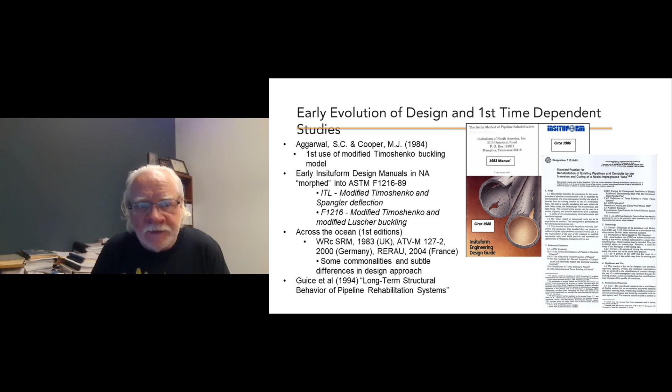The other really critical chunk of early work was what Insituform had commissioned to better understand long-term behavior. That was really the evolution of design, and Guice's work at Louisiana Tech was the first long-term structural behavior study, putting some meat on design in terms of understanding the time-dependent properties of liners, which is a really critical aspect. That is the framework of knowledge.

I still go back to this symposium that was held, and it was enlightening. Part of it was holding a symposium to try and get a handle on how design was done and the differences around the world. It was organized at University of Waterloo in 2001.

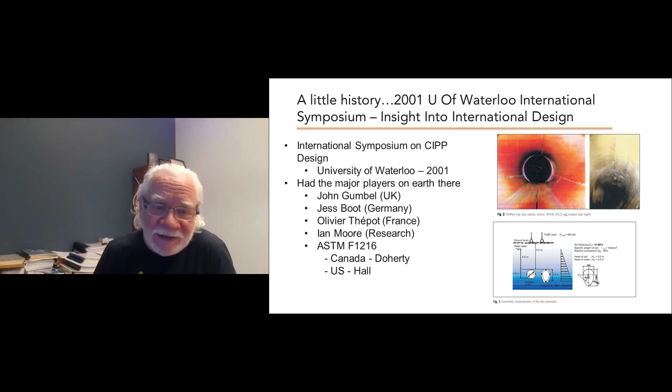I would say if there's a weakness in it, it's that we looked at two pipes that weren't really beat up that much. You learn a lot when you dig deep, but in essence the first conclusion was that F1216 and the way these pipes function sat right in the middle. If you look at face value, 13 circular designs were submitted, and F1216 prior to 2007 sat right in the middle of that.

That was basically the Canadian and American approach: one said it's fully deteriorated, one said it was partially deteriorated, and they averaged it out, and it sat in the middle of all these other analytical models out there. The subtle thing we learned when we dug a little deeper was that there was a fundamental difference.

I know in a paper that Gumbel had written, trying to understand this, he directly worked with Aggarwal and Cooper, but the Aggarwal and Cooper model was based originally on the Timoshenko model, which is an unrestrained buckling model. It was adjusting that model to accommodate for the fact that the pipe is actually constrained.

At the same time period, about 1977, Glock had developed one of the first constrained buckling models. That constrained buckling model more closely aligns with what a liner really sees.

The other thing that's subtle here, and it's not surprising—it was brilliant work that Aggarwal and Cooper did—but they never tested a pipe bigger than 10 inches, and they had a limited data set. It was very, very innovative work.

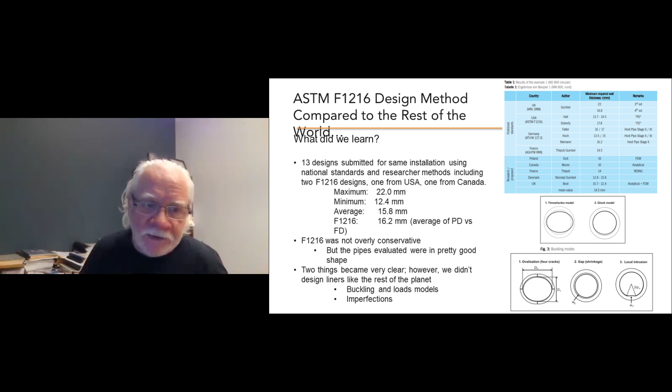The evolution kind of came to a head in an ASCE committee report, the PINS committee in 2007. That really debated the wisdom of continuing to use a Timoshenko solution versus Glock. And why would we not advance to a model?

The reality is that a hinged concrete pipe doesn't disappear. A hinged vitrified clay pipe does not disappear over time. There's the interaction of that and the subtlety of it when you stop the deterioration process that needs to be factored into design. And then the fact is that in a traditional model, when we design, especially when we use the buckling, the AWWA buckling model that was there, what it's really designed to analyze in terms of the stress distribution on the pipe is the initial consolidation process around the pipe.

Well, when we're relining pipes, the initial consolidation process is long gone. And if that pipe's broken, the stress distribution is different. And if the pipe hasn't broken, it's a much different stress distribution. So we need to understand the difference between the initial burial condition of the pipe, if that's what we're analyzing, versus a mature burial condition at lining, and how that will react with pipes.

Because one of the observations of the PINS committee was that the AWWA buckling model was in essence too conservative. They made an adjustment in equation X1.3, and it's one of the hardest things I have when we go and teach this stuff, because they made an equation that was technically wrong from a practical perspective, because it's not the load that a liner sees. It's not that they made it right, they made it less wrong.

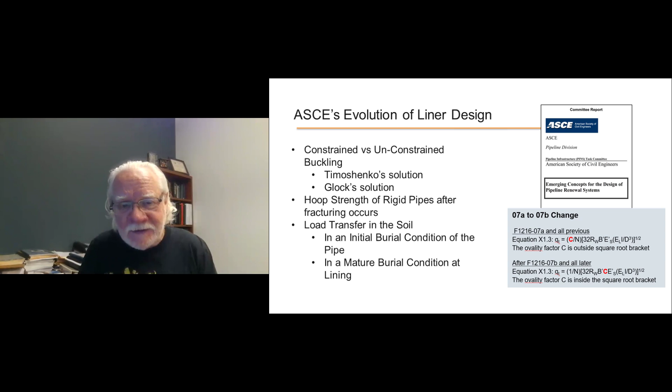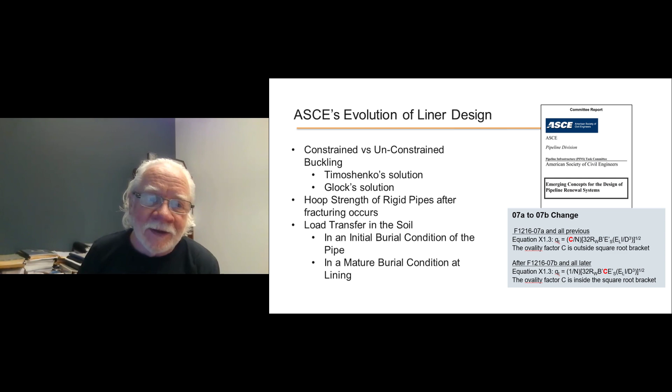But in essence, it's not based on load studies. It's just based on an understanding of load cells and stuff, but it's a rough concept to go and teach. It works, and because it works, if you use it in the right application, that's fine. But in the context of knowing it or trying to resolve higher risk assets, you need to look at things in a little bit more detail.

The PINS committee basically said that some portions of this were just too complicated, or too conservative, because they didn't match the real load on the liner. That's a critical aspect of what we do. And then the other side of the equation is, wow, this original thought that there are some pipes we deal with that have imperfections this model doesn't work for, we better consider those.

So what happens if we don't get a close fit? What's the difference between having a flexible host pipe and a rigid host pipe in the context of the way they break down? What happens if we're lining over something and we have an intrusion? What happens when we have flats? Those are all things that should be reflected in the model.

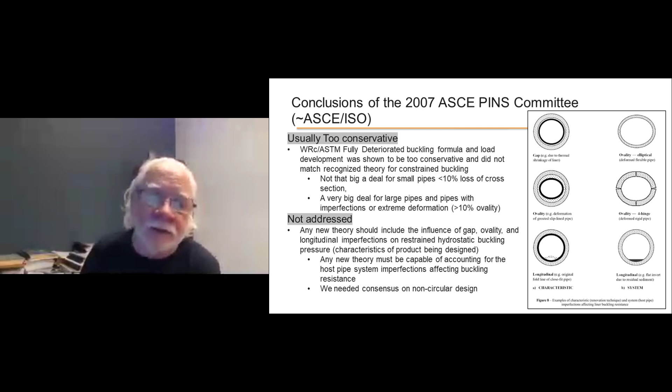And again, many of them were addressed in some manner in the original Insituform design and Aggarwal and Cooper's design in the 1980s. If you look at what is the fundamental difference, and I don't think much of us appreciate this, in the context of 1216, the design theory is the initial consolidation process.

So it's looking at a host pipe, the way it looks at a liner in the context of load transfer to the liner, in terms of a direct buried pipe and ignoring the host pipe. That is problematic in the context of when we go and look at things. Certainly it works, as I said, for a number of things, as we'll talk about later.

But MOP 145 is intended to look at true host pipe soil interaction. So it's looking at interaction with the host pipe, and in the context of a broken host pipe or a flexible host pipe, we have earth transfer. It looks basically at the concept of earth transfer. The fully deteriorated design states are compared versus 3 design states, the Glock-Thépot buckling model, which is the way that we respond to hydrostatic stress.

The first interaction with soil is more covered in Thépot's work in ASTEE 2017, and then the fact that these things may adjust over time. In areas where it takes time for the host pipe to interact with the soil and mobilize passive soil resistance, there's a state three where pipe stiffness really, really matters, and we need to examine that change.

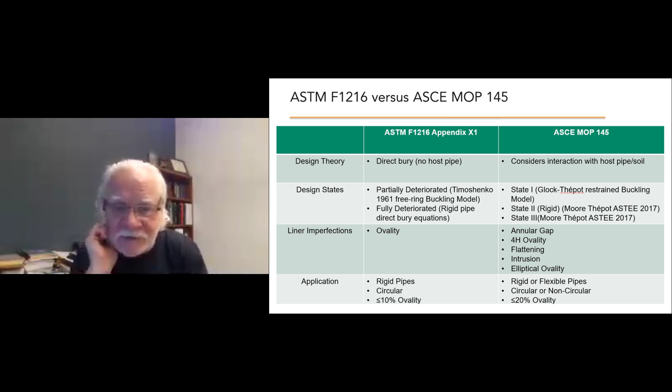The other thing I don't think a lot of us think about is the application - F1216 was never envisioned to be used on flexible pipes. It's a rigid pipe application for circular pipe with less than 10% ovality. There's a big difference in terms of what happens to a liner when you put it in a flexible host pipe versus a rigid host pipe, or a rigid host pipe that's broken. Those are radically different types of load distributions that occur to the liner.

At very, very light loads in terms of the load on the liner, it's very, very conservative - more conservative than it probably has to be. On the other side, at extreme loads, it's actually the opposite - less conservative than we think it is in the context of things.

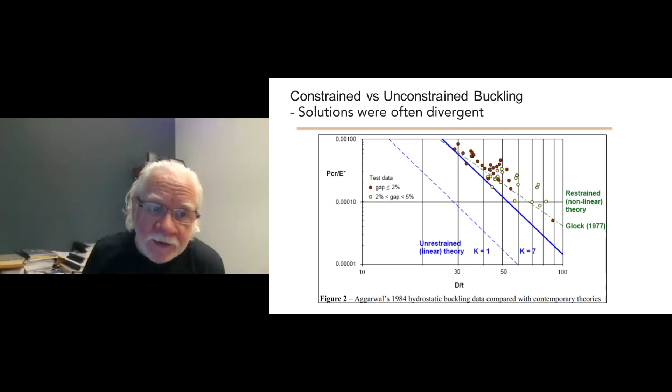So that was one of the concerns of the committee, and it's one of the reasons we're looking at a constrained versus an unconstrained buckling model.

The non-circular side of this is also a really important aspect. I'm guilty, like any other engineer, of using this way beyond what it was ever intended, but we used to use WRc design. If you go back and pick up Glennie's work, he looked at two pipe shapes - a perfect egg or a perfect oval. He developed an FEA model to simulate that and came up with some very eloquent equations.

You'll notice that none of his equations really include the geometry distinction of whether it's an arc or a straight line - that's the only question, is it an arc or not. If you've ever worked out in the world - I work in Detroit and I've worked in Cleveland - in Detroit I found a drawing with over 150 different versions of an egg. When I went to Cleveland, they had another 150 and they didn't match the ones in Detroit. There's an infinite number of variations of these shapes, and they don't match these shapes exactly.

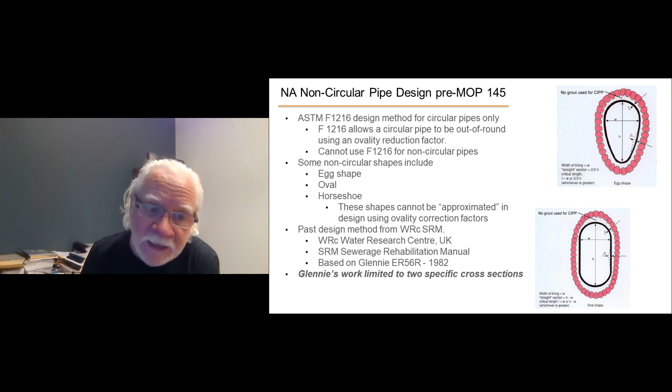So these were limited to two. When Olivier Thépot looked at these in 2000, and then Gumbel and Boot looked at them again in the mid-2000s, their concern over just using the old WRC solution was that a constrained buckling model itself - this upper line - didn't explain what was going on with the liner. They came up with a better model that considered all of the things we talked about.

It's just that sometimes it was less conservative than WRC, sometimes it was more conservative, but the WRC solution was basically divergent from what we would see in true load cell work. So you had to know the range of application at which the WRC was not misleading in the context of it.

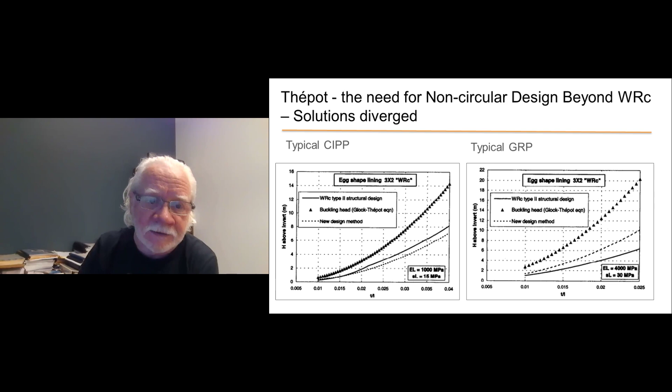You can look at these two papers if you Google them - Olivier Thépot's work is documented in a 2000 paper, and Gumbel and Boot's work. But basically, the importance of looking at these things in terms of their interaction with the host pipe really forms the basis of how we look at non-circular design today. So it's more complex than WRC, but honestly, for a non-circular pipe, I wish I could explain it - there's a lot of reasons for circular pipe to continue to use F1216. It is eloquent.

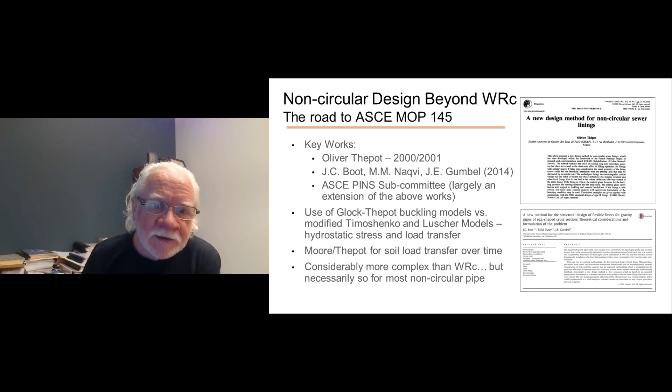It's tough to look at a non-circular pipe with the same lenses. It is a more complex shape and has more complex loads on it.

In the MOP 145 design procedure, in essence we have 4 steps that are out there to look at the imperfections. It is a factored design resistance, an LRFD model, and we have a variety of limit states.

We're still looking at flexural modulus and strength, but that can be applied in many different manners. It can be applied in terms of buckling resistance, as a serviceability limit to limit deflection, and in terms of understanding what happens in the hoop direction to a liner.

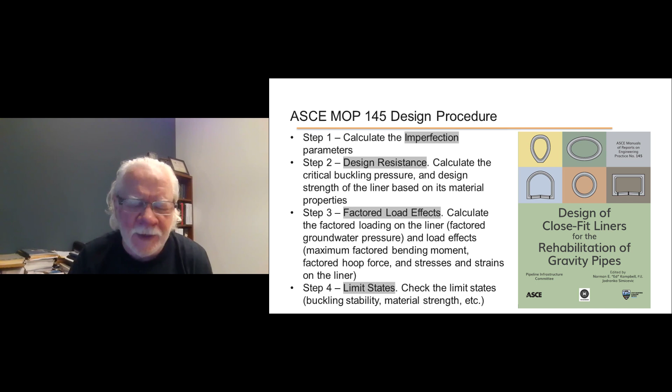So the limit states are a little bit more robust than what we look at in F1216, which looks at buckling and strength, and it looks at strength incorrectly in the context of most of our applications.

3, not 2. So we have the view of a pure hydrostatic stress in a rigid pipe, the first interaction with soil, which is state 2, and then continued deformation over time, where does the liner have the ability to adapt and develop full passive resistance of the soil? What's the long-term condition?

A flexible pipe is a different beast, because if you have a flexible host pipe, there is no such thing as partially deteriorated design. You will always have some degree of load transfer because the pipe is already deflected and has mobilized passive soil support. So there's 2 conditions.

There is this condition that the host pipe has passive support, and it's a little bit more than hydrostatic stress alone, but in essence the pipe is already stable. And then you have an extreme condition: can it accommodate the long-term adjustment associated with material degradation or subtle changes in the soil environment around the pipe?

The other thing we need to understand in terms of this is for flexible liners, designed as flexible materials. Basically, they have the ability to deflect over time without cracking, and that means a spray-on rigid liner doesn't count, like a geopolymer or cementitious liner. A polymeric one that can bend definitely follows the theory, but not rigid products.

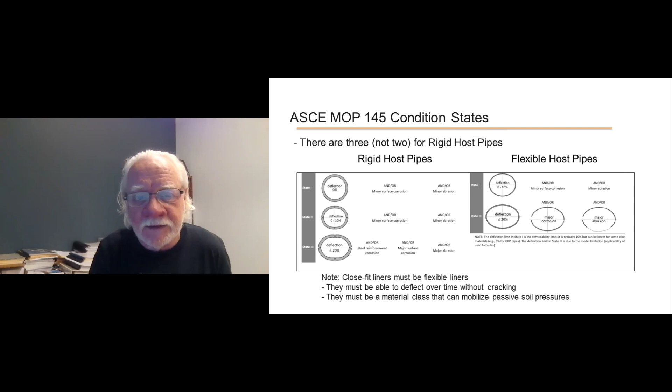These imperfections are a beast. I wish they were simple. They are actually not overly complex, but the good thing is that the more work you do on imperfections, the more you find they have to be pretty profound before they really govern design. Some examples may govern design, but by such a small amount that it's not that big a deal.

Some of them do, and they catch you up. And that's kind of the subtle thing about these practical observations from doing sensitivity analysis. It's one of the really important ways that we understand design.

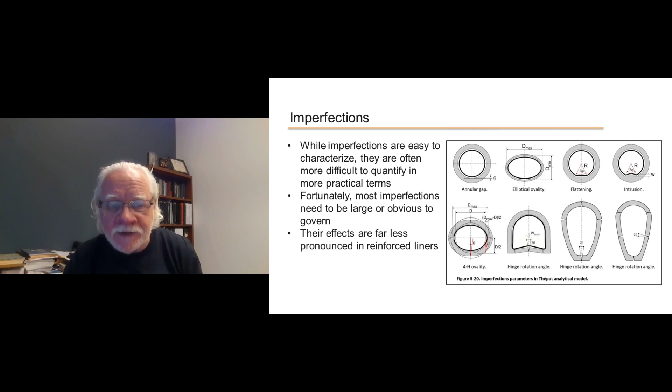The other thing is that when we move into reinforced products, or where mechanical properties are much higher, the point at which imperfections intervene is far, far less in terms of how much it dominates things.

The other thing I find impractical or just tough to deal with is that the way they're defined in the MOP is in terms of an angle that I've never measured in my life, and quite frankly we will never be able to measure. So we can estimate these parameters by back calculating with other methods.

So in the context of a 4-hinge ovality, we estimate that all the time. We can visually do that and then back calculate the significance of it on the pipe. If you have a camera centered in a circular pipe, you can use a pixel counter and accurately measure deflection. You don't need LiDAR for it. You'll be in the ballpark, and you can back calculate the equation to solve for it. It's not a radical concept.

The good thing about the flat side of things is that when you do sensitivity analysis, even on an unreinforced liner, it's got to be a whopping big flat before it really dominates. Typically in sensitivity analysis we've done, it needs to be about a third of the diameter before it governs, and we don't see a lot of flats of that magnitude.

So again, some sensitivity analysis to know whether it governs or not. You're never going to visualize what that angle is, but if you appreciate that, and can estimate the length of the flat relative to the diameter, you can back calculate what that angle is and do the math associated with it. So from a visual identification technique, you need to look at it in practical terms to back calculate the defect.

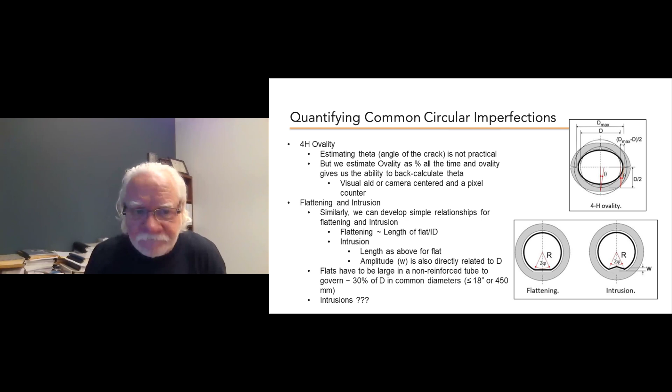Intrusions are a little different beast because when we're looking at buckling, it's already buckled. We've lined over a surface that is exactly the opposite of how we want it. So intrusions are subtle, and they do need some understanding of their significance.

This is a pipe that we looked at in Cleveland. This was an emergency repair, and if you look closely at the video, there's an intruding lateral that they really couldn't take out. So it basically had lined over this and then post-grouted it from the perspective of filling the void. But you'll see this little blip on the inside.

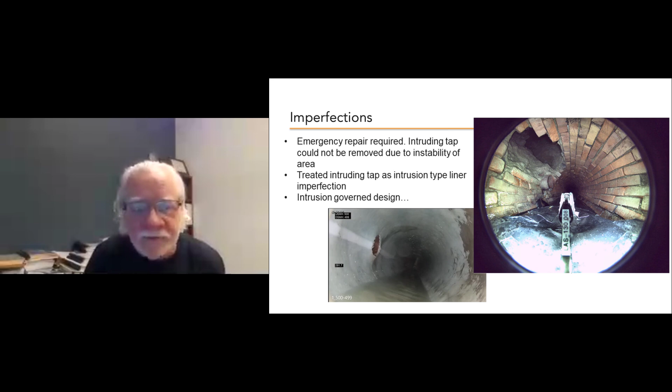Again, in checking that, we found that the shape we had created actually governed design. Not by a lot, but in fact the design needed to be a little bit more conservative because of the intrusion. So it's a subtle thing that you need to do some sensitivity analysis on. The amount that it modified design is probably within the processing allowance that George would have allowed anyway, from a practical perspective, between the thickness we calculate and the thickness we use in practice to put a piece of CIPP in service and allow for processing. But in essence, it did govern design.

And then from a practical perspective, George often sends me pictures like this, because this is a rigid concrete pipe with an ugly looking crack in it at the beginning of hinge. In essence, they were asked to line over this. So we're going to do exactly that. We're going to induce an intrusion.

And that's a complicated thing. It's an easy thing to solve mathematically, but it's a little bit more complicated to understand what that deformed shape is going to be. So a little bit of sensitivity analysis is required to understand what impact that has on design.

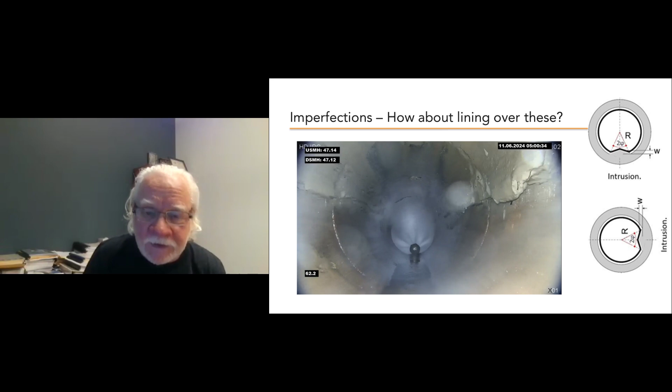The idea of what you're looking at is that same little blip on the bottom turned on its side, but analytically, within the context of MOP 145, you have the ability to look at it and solve that problem to see if it governs design, and to understand how big a blip and how flat it has to be over, and what sort of area, before it would govern design and how conservative to be. But it gives you the ability to look at it, and with sensitivity analysis you can exercise good engineering judgment as to how to accommodate it.

The annular gap is a big deal in these, and the liner resistance in the annular gap is a problem. One of the enlightening things for me is when I pick up ASTM D5813, it basically tells us we can allow 2% shrinkage on a liner. In an 8-inch pipe, that's not that big a deal, but in a 24-inch pipe, a 36-inch pipe, that's a really big deal. And in essence, it will govern design. So from a practical perspective, you need to understand the potential impact of a gap from shrinkage.

The good news is that it's a processing issue, not a sizing issue. Liners stretch. Even a reinforced tube has the ability, with the right head on it and good judgment in terms of sizing, and during the curing process, the resin curing actually allows or forces the liner to expand outwards towards the wall.

It's the process of stopping it from curing. Basically, if you interrupt the curing process before it's completed, and if you cool down too quick, you will induce shrinkage. That's what causes an annular gap. So from a practical perspective, this is a process control issue.

You can control it. And when we get into a reinforced tube, it's a function of the amount of resin you have in the pipe wall. So in a reinforced tube, we have a lot less to control from a practical perspective, because there's less resin volatilizing that can shrink at the end of the day or induce that shrinkage.

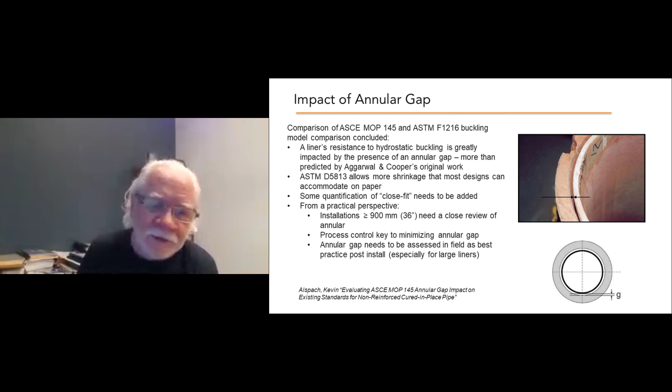But it needs to be addressed, and in larger pipes, from a practical perspective, up to about 600 mm or 24-inch, I can see whether I got a close fit. You can see the interface of the liner. But for large projects, you need some means to sit there and either do sounding, take some samples, but the core of it is you need to really focus on process control. Make sure the liner is adequately cured, and make sure the cool down process isn't ignored in the context of reinstating that, for steam cures and hot water cures.

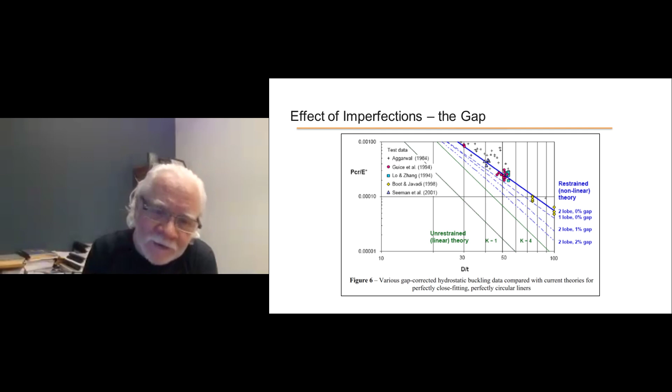The gap, again, is an area that from a practical perspective, the reason we focus on it, or make sure it doesn't fall through the holes at the end of the day, is that relative to our previous view, it has a greater impact than predicted by Aggarwal and Cooper's work, and it's divergent. It's much like the constrained buckling model. All of the load cell work we've done on gap since then has basically reinforced that a constrained buckling model is a better representation of the process than the original work trying to modify an unconstrained buckling.

Reinforcement has a profound impact. One of the things F1216 does is limit you from using greater than 10% ovality in a pipe. And this is what ovality does in F1216: it predicts a very conservative tube, where in fact the increase in buckling is actually linear over that process. We look at the true impact of it. So it basically would, yes, you say it just makes me make a thicker liner. Well, it may make me make a liner that is very difficult to cure.

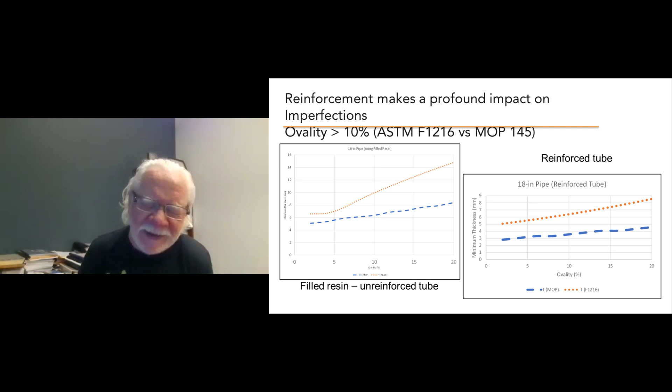And if I make the liner too thick and I can't cure it, I don't get full cure, I have a greater probability of getting an annulus gap. So you want the liner to be structurally robust enough, but you don't want it so robust that you've compromised your ability to get a proper cure on it. A proper cure is how you minimize the annular gap. A lot of the sensitivity of this, as you get into a reinforced product, changes. I'm not telling you to use a reinforced product, but just understand the subtleties of them in the context of the difference of their impact on imperfections.

The last thing I'm going to talk about before giving George a few minutes to talk is the non-circular parameter assessment. The reality is that the MOP wants a radius, they want a real dimension. And that's much different than the work of Glennie and the old model, and most of us scratch our head at that. So in preliminary work, there's very few of us that have done LiDAR and sonar out there in point clouds. It can be done, it's a lot more expensive. So you have to rationalize what is the sensitivity of understanding that radius before looking at a record drawing or trying to understand it. But it is a reality, and how those pipes are constructed is very important.

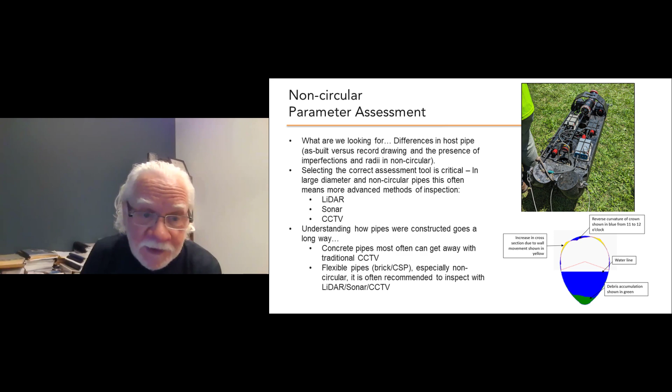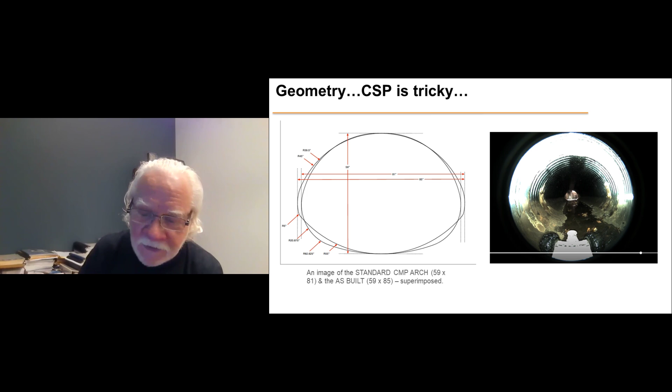So concrete pipes, you can typically get away without doing this as pre-work, but you will certainly need to verify it in the field. Flexible pipes get a little trickier, and I can illustrate that in a moment. If you just take a look at this - this was a colleague of mine who presented this - unless you look really closely at the back part of this picture, this looks like a circle to me. But that's a corrugated steel pipe that is a whopping big arch, and its record drawings indicated it was 59 high by 81. That doesn't look like that. It's visually very difficult to see in a CCTV camera. We actually measured it, and it was actually 59 by 85 inches wide, just in terms of how it responded or the subtlety of how it is. So those are important things to understand as we get into flexible pipe.

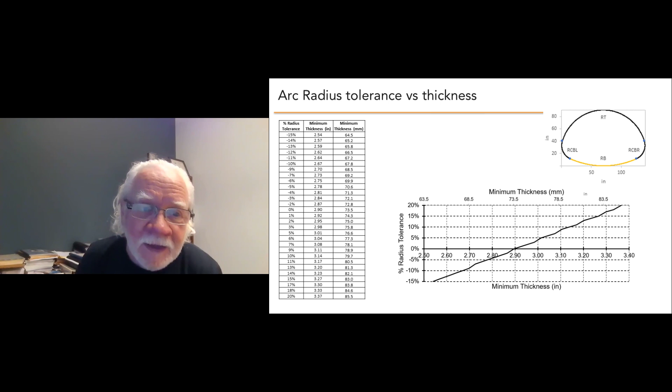Radius is a big deal. They can be off quite a bit. How accurate? If you don't do sensitivity analysis, you'll never have any sense for radius, but it's important to do sensitivity analysis when you look at radii, because you'll never have radii to 3 decimal places. You won't find out until you literally get into the construction phase and you're trying to measure it. So understanding the significant impact of the thickness going down or up, and how accurate you have to be for a particular shape, is a good piece of sensitivity analysis to do.

The other thing is, how do you go out and measure that in the field? In a circle and an egg, I had to do some digging, and you need to understand what a sagitta is. I didn't know what a sagitta was until I started doing loss of ground calculations. But if you go out with something as simple as a straight edge that's a fixed length, and it can be anywhere along the radius, you measure the length, and you measure the maximum deviation from the straight line on the radius, you can back calculate the radius using the sagitta and the chord length, basically half the chord length.

I'll caution you that there are a lot of subtle derivations of this based on whether it's the whole chord length, the half chord length, or how you do it. This is a rather simple way of looking at it. But it's a very practical way to go in and find out what radius exists in the field, to confirm design, just by taking a straight edge, placing it on the wall, and measuring the maximum offset from it. It's a practical way to understand that.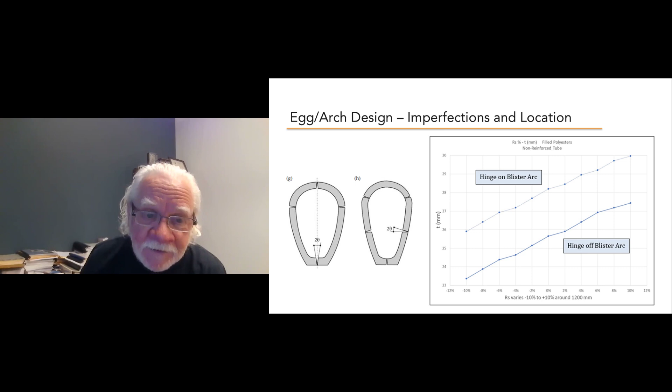Within MOP 145, you have the ability to adjust for this, and it's an important aspect. In the context of lining, if you're stopping it from deteriorating and there's no cracking now, the rationalization is that it's not a cracked pipe. If you don't know, or you're afraid, you would make the judgment to deal with the blister or imperfection right in the middle of the arch. But it has a profound impact on design.

With that, I'm going to turn it over to George, and he's going to go through some of the challenges as he sees them from a practical perspective, all the stuff a designer says when they tell the contractor, I'm just offloading the design on you, you figure this out.

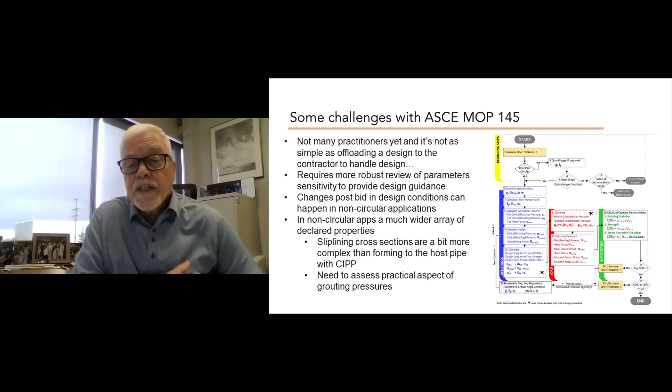Next slide, page down. Trying to advance the slide. There we go.

With that roadmap again to the left, you can see a list of equations that have to be solved. There are over 40 equations that are solved, and this is in proprietary software. You don't always see this in some of the commercial software. I'm sure that most practitioners getting into it have developed or are working on these types of programs where they can actually understand and see what's going on, as opposed to the black box approach.

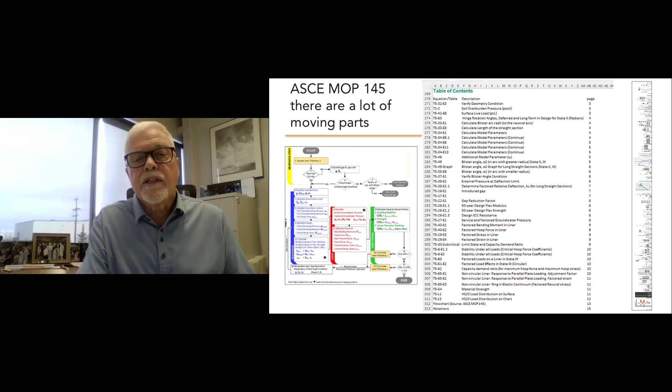These next slides show the items that come up, which are actually the equations being calculated - again, there are 40 plus of them. Wherever you see a curve or a graphic, typically it's indicative of an iterative solution. So you can see there's a lot of work that has to be done. It's not something you'd ever want to do freehand or by hand without having a program to work with.

These are the rating curves we discussed earlier. The top one is for varying flexural modulus, the bottom one is for flexural strength. Depending on the material properties at the bottom on the x-axis, you can go up and pull off the thickness you should be aiming for. It's a combination - you have to check both the flexural strength and the flexural modulus, and you pick the one that gives you the thickest liner. As you can see, these aren't straight lines, so there can be some variations as you change.

The beauty of it, though, is that it allows any contractor to come in and bid on the same basis as the second contractor or whoever, because you can put in the material properties that you're comfortable with or that your product actually uses. When we end up with these curves, it gives us that ability.

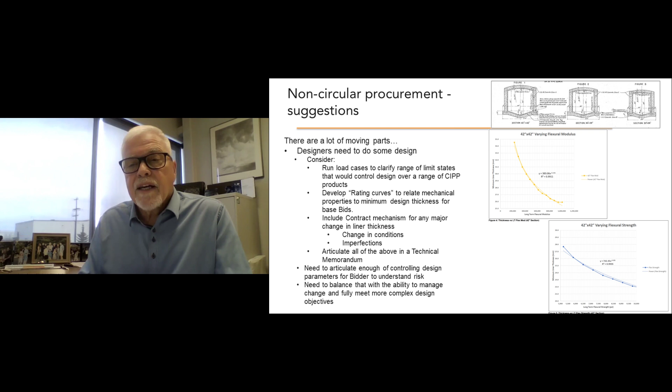But there was a spray-on cementitious coating, and it folded in that one particular case. Can you line that with a standard F1216 design? Probably not. A similar case was in an egg-shaped pipe where we ended up with a large protrusion because of a repair, and it was one of those things where you could do man entry, but nobody wanted to get in there because you didn't know what was behind it. Did you have solid concrete behind it, or not? This again had to be designed with the 145, and we were able to come up with a process that made sense to both the consultant and the owner, as well as our guys.

Where is this appropriate? It's seeing a lot of traction with CIPP lining, slip lining with plastic and glass fiber reinforced pipe, where in those cases, again, you have to grout the annulus, and fold and form thermoplastics. I think the biggest application for it is going to be in the non-circular pipes. However, as Chris mentioned, when you start getting into the larger diameter pipes - is it 450 millimeter or 900 millimeter - where does that gap start to influence the design, the annular gap?

Hello, is this George? Sorry, somebody called me that I couldn't get rid of. I don't know if you heard that.

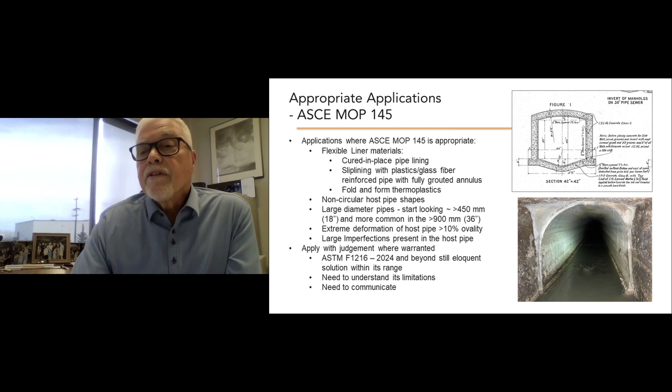Sorry. So we get into pipes with the larger deflections. F1216 is limited when you get up to over 10% ovality. When we start getting those larger deflections or imperfections that I mentioned, F1216 is still a good tool. We need to understand where's the envelope for it, and where do we start transitioning, and we need to be able to communicate those situations clearly. And Chris, I guess you're back up.

Just to reiterate, it's an evolution of the design process, and one of the things that's real is that it certainly is a more accurate view, sometimes thicker, sometimes thinner. But it is more reflective. And that doesn't mean just because it's more technically correct - George articulated, and I would reiterate, there's a lot of moving parts. So it's important to articulate this in a manner that can be bid, that's fair, that in essence people understand it. And that means thinking a little bit outside the box. Your parameter selection, understanding sensitivity and precision is a really, really critical part.

Certainly in the context of the two questions I can see here, one of them is about CUIIC. Yes, CUIIC is a verified piece of software - not the only one, but it is verified, and Olivier works on it with Jordanka, and it's a very reliable tool. It does look at one case at a time, so doing sensitivity analysis with it requires quite a bit of work, and that's the type of stuff George and I are working on, ways we can do more sensitivity analysis with it, because you can see then the radius in a non-circular pipe. Understanding how accurate you have to be is really, really important.

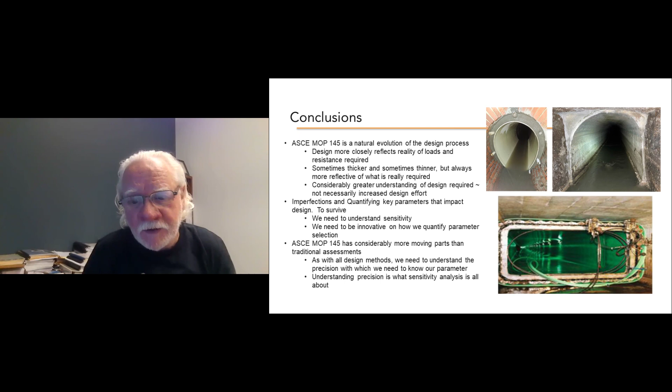With 3 minutes left, unless there's any more questions, I'll turn it back to Carol and see if there's any more questions out there.